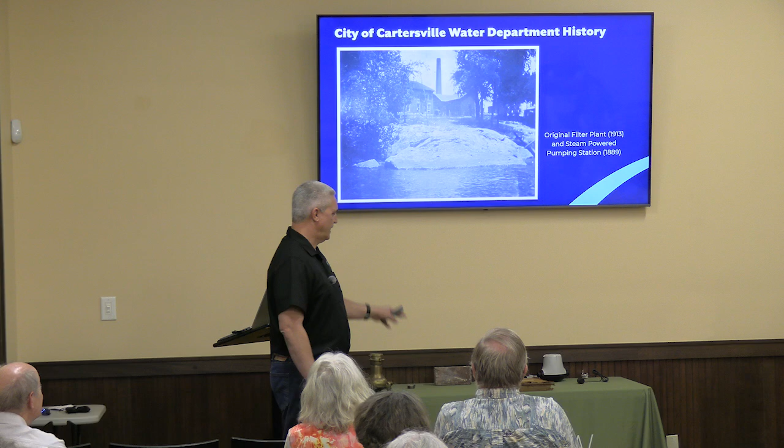I try not to bring too many props here, but I do want to show you because this is fascinating to me. I did not know about this contract, but I found it in the meeting minutes of the city of Cartersville's city council meetings. This is from August 2nd of 1887 to February 14th of 1893. You can see this just sits in the vault over there at City Hall.

But on, where's it at? I just wanted to show you. Here we go. This is the contract, written and signed in this book by the alderman and the mayor of the city of Cartersville.

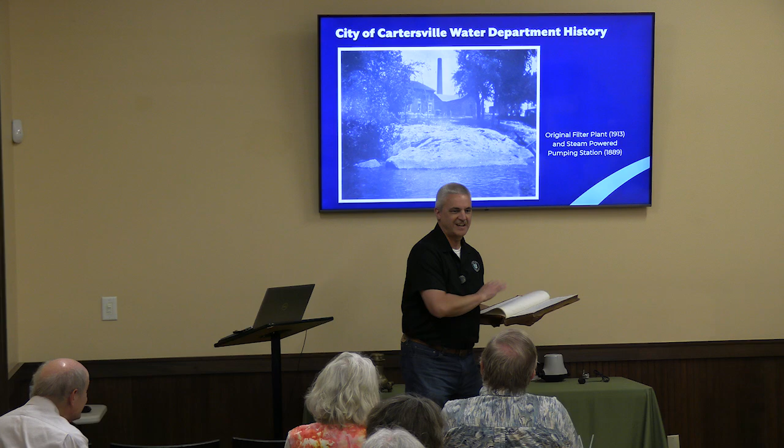So that's how I found out that this existed. And I just wanted to show you one thing. I know this has nothing to do with the water, but it just fascinated me. Look at that calligraphy. You see that? We used to know how to write.

Oh, it is. It's definitely really fancy. It's hard to read that kind of cursive writing. I know, from way back.

When I was doing that research, I went in and actually retyped the contract in my English, and it took weeks just to read and get it on the paper and try and get it right. So I have it in a Word document now, but that's more fun, right?

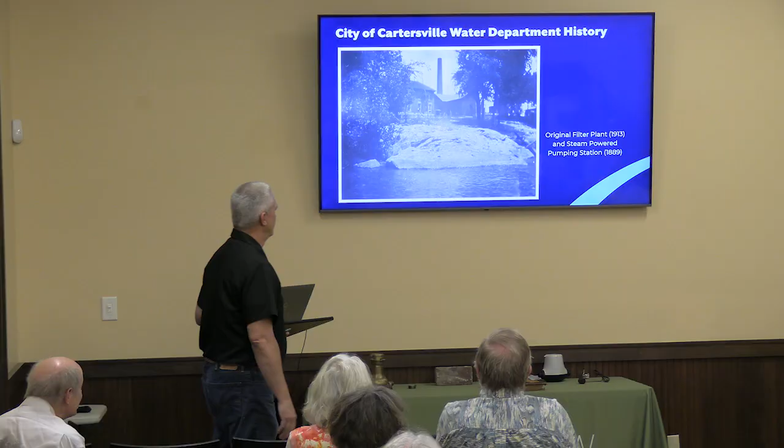But anyway, that's where the water system started. So what they built, this is a little copy of what I just showed you. August 6th of 1888, they entered into the contract, a 30-year contract. So again, this is a private company coming into Cartersville, building the system. Cartersville had the right to use it, but it did not belong to Cartersville.

It was a 30-year contract. The Jeter and Boardman would operate it for $2,500 a year. The reason it's $2,500 a year is they installed 50 hydrants, and they charged $50 a year per hydrant to have that system in Cartersville.

They built from nothing to an entire water system between March and October of 1889, digging with mules and laying pipe by hand. It was cast iron pipe.

The system included the spring, as I mentioned, two 60 horsepower coal-fired boilers, two 700,000 gallon per day compound duplex steam pumps. They were the Worthington brand, if you're familiar with steam engines and pumps. About 6 miles of pipe, one steel water tank on top of a 70-foot brick tower. And if you know the area, Jones and Stokely Street up there on Summer Hill, the corner right there, I think there's some apartments or housing right there on that corner now.

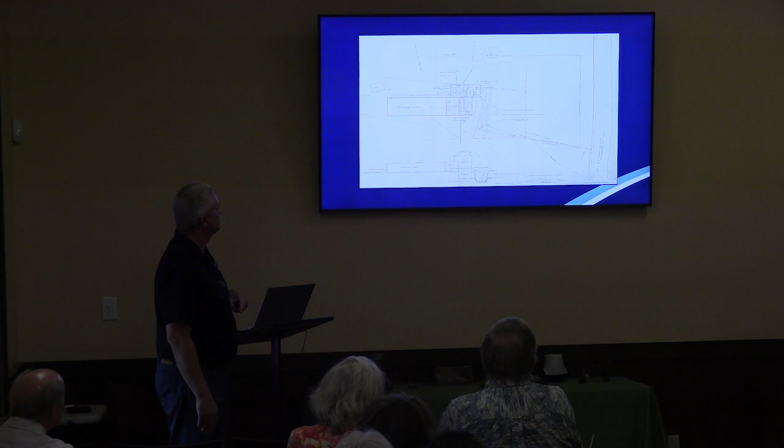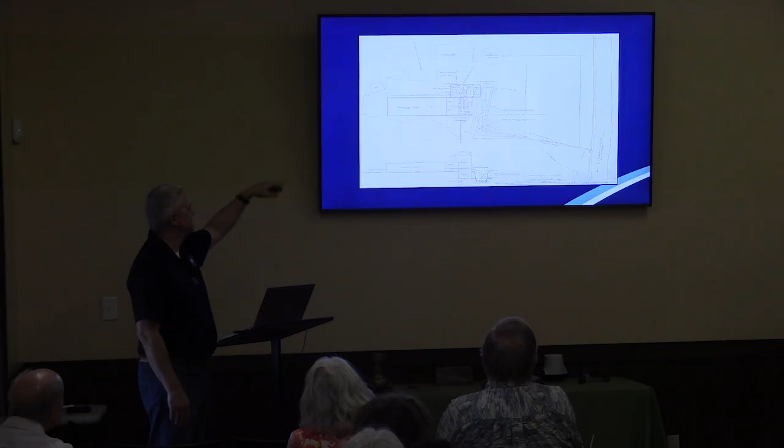This is one of them, that's kind of the layout. You see there's a plan view up top and a profile down at the bottom. You can see to the right, that's the Etowah River. Up above it, outlined at the top, you can see where the old spring was, the circle. That's the old spring. To the left of that is where the pumps and boilers were, with a coal yard right outside. So that's the old stuff, 1889. And then the 1913 plant is right in the middle.

They put an intake down on the river, just a pipe sticking in, and pumped it by electricity, right? New thing at the time, into this plant. That plant could treat 1 million gallons per day. It had two sand filters and what they called a subsidence basin or settling basin, where you coagulate the water, settle out the dirty stuff, take the clean water off the top, filter it through the sand, and pump it out.

But that is the original drawing. That stuff is still there. It's in the trees, you have to dig for it. There may be critters living in it, but it's still there. There's actually a little more than that, and we'll get into that in a second.

This is another view I wanted to show, a close-up of the chemical injection. I'm not going to do the whole water treatment thing, but the way you do it is you put aluminum sulfate, or at the time they called it sulfate of alumina, or what we call alum, into the water. It coagulates it and makes the dirt turn into solids, which drop to the bottom by gravity, and then you filter the clean water off the top.

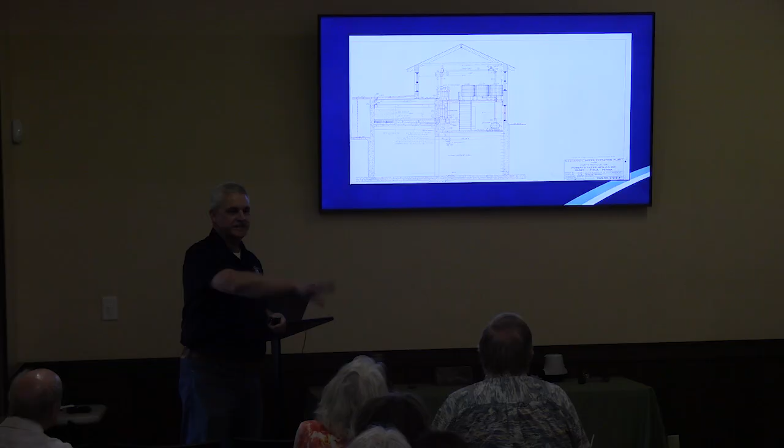And that was it, right? When Roberts Filter Manufacturing, like I said, just got the dirt out. Something that didn't happen until 1908, and Roberts Filter was one of the first ones to get on board. If you notice, there are 3 tanks up there, like wooden barrels. The two on the right, I know you can't read it because I can't read it either, but it says alum. That's the aluminum sulfate.

The one to the left says hypo. You know what hypo is? Chlorine. Chlorine is bleach, right? They had figured out that just getting the dirt out is not good enough. People get sick still.

So in 1908, Jersey City, New Jersey, America started disinfecting drinking water with chlorine. Right down the river from them, in Philadelphia, Pennsylvania, was a large plant that first started adding chlorine to their water to disinfect it. Sicknesses went down, typhoid kind of went away, and cholera and those waterborne diseases. Right down the road from them, Darby, Pennsylvania, Roberts Filter Manufacturing figured that out. They started sticking it in their plans. First one in Georgia, right there. We were the first ones to disinfect our water in Georgia with that tank.

The way it worked is you poured bleach in the top and it dripped through a funnel and went into the water. We don't know how much, it could be a tank a day or a tank a month. It was just chlorine going in the water. Anyway, that was fascinating to me. And I got that right from the designer or design company.

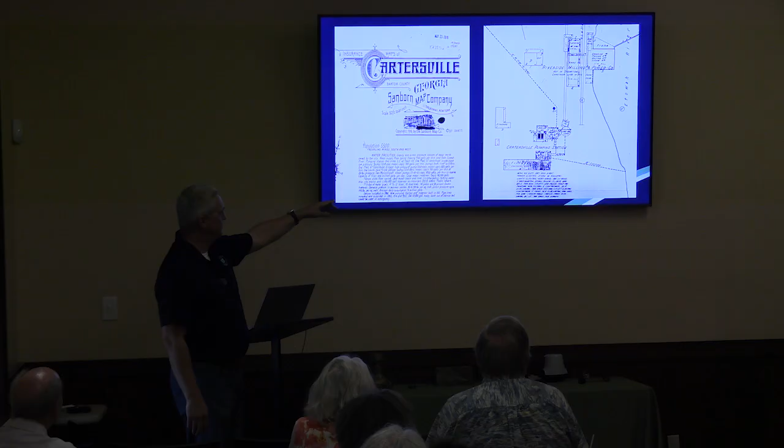Over to the right, you get a little bit better picture of this system. River's over here, there's a suction in here. We've got the filters, and then it's pumped out. They would also use this spring as a reservoir - they could pull out of that as well. So they continued using both. Somewhere in the writings it says we're still using the spring, but we'll use the river in an emergency, even after we have the plant here. So it was hard to give that spring up, I think.

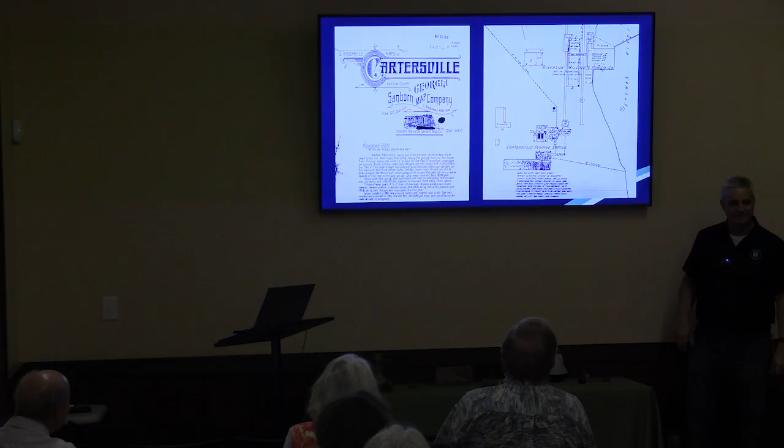If you go out there right now, you can find that spring. There is a circle in the ground - it's like a crop circle out there. One of the last operators of this plant still worked here when I started. I trapped him one day and said, go with me and show me this thing. And he did, and he showed me that circle. I'd never seen it before, but it's still there.

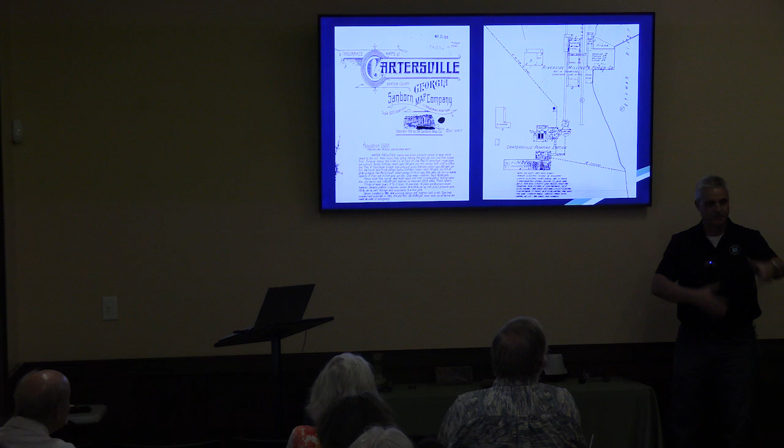So I started digging. I don't know if I was supposed to. But I did read that as this thing was built, it was brick lined around the outside of it. So what I did was I dug up a brick and kept it in my office. This is out of that spring right there. That was the brick that was laid there in 1889. You can't have that one.

So that's just kind of a picture. You can see where the old mill is over to the side and where the dam kind of sticks out there.

But yeah, I've crawled all through that thing and it's fascinating. It's amazing how little the technology has changed in water treatment. It works, right John? Still doing it the same way. It's cost more though.

So, okay, where are we at? By 1918, we had already destroyed the tank on the hill over here, the old steel riveted tank. We needed a new one.

In 1907, we contracted with a - I don't know if he was a contractor or a farmer - contracted to work not fewer than 10 mules a day digging a water reservoir on top of Ackerman Hill, which we call Reservoir Hill, Morningside Drive behind the old cable TV place up there on the hill now. I don't know that he ever finished that job.

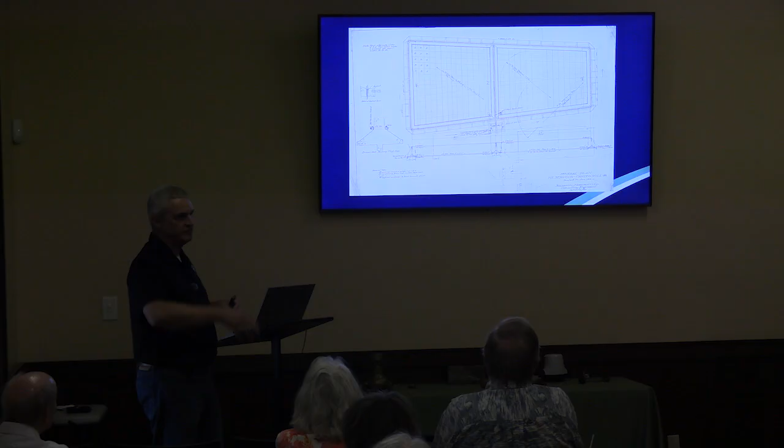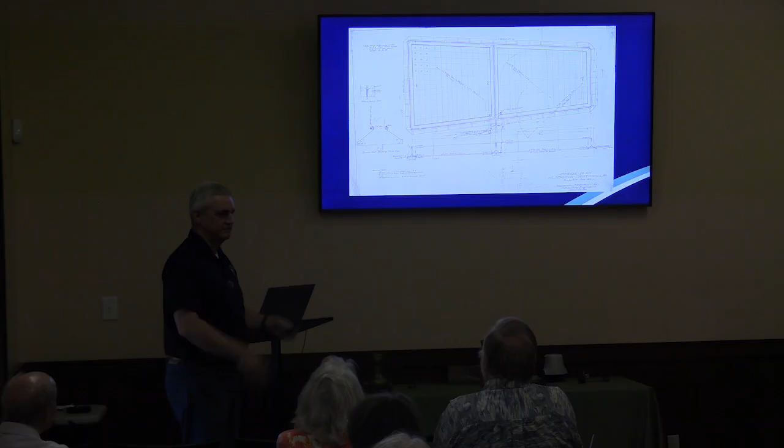But when we built the treatment plant, we had to have a place to pump the water to. So we contracted with Solomon Norcross to design a 1.1 million gallon open top water storage reservoir, where the water was pumped out of the treatment plant into this reservoir, and then it fed by gravity to the town from there. Again, when I started working here, I went in that reservoir - it was still there. People dumped trash in it, but it was there. It only got covered up within the last 15 years, I think, when they put the big cell tower up there on top of that hill.

What it looked like at the time was that. That's drinking water - that's not creek water, that's not river water, spring water. That is drinking water. So I don't know what all went into that water before you got it. As you can see how well it's protected - I mean, a 6-foot fence, no bird's going to go over that, right?

So yeah, state of the art at the time. Dug out by mules, and then concreted with asphalt joints, 1.1 million gallons.

Also in this time, I'm not going to go too much into it because I don't have a lot of information, but we were building a sewer system. At the time, the sewer system was pipe it out and dump it in the nearest water, the Etowah River. We had two outfalls. One was this far from the intake into the Etowah River for the water treatment plant - you could throw a rock from one to the other. It was downstream. The other was over near where our sewer outfall is now, on the 113 bridge at the Etowah River where Pettit Creek goes in. That was our other outfall. So if you were on that side of the courthouse, Bartow Street, all your sewer flowed that way. If you're on this side of the courthouse and Bartow Street, everything went near the water plant.

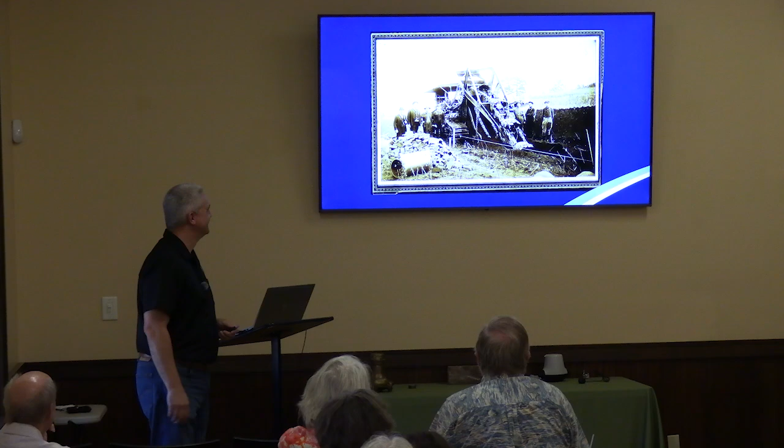I'm not sure where this was or what they were putting in there. I just know they were very proud of their machines—otherwise there's no reason for two men to be in suits out there when we're digging ditches. You can see he's still got his suit and hat on, so he's really proud.

Those are flushing manholes. What we would do is run water into a sewer manhole, and if the sewer got clogged, you'd go into the manhole and open a valve connected directly to the drinking water, by the way. You'd fill it up, and then it works like a toilet—flush it out. We had them all over, up until like 1990.

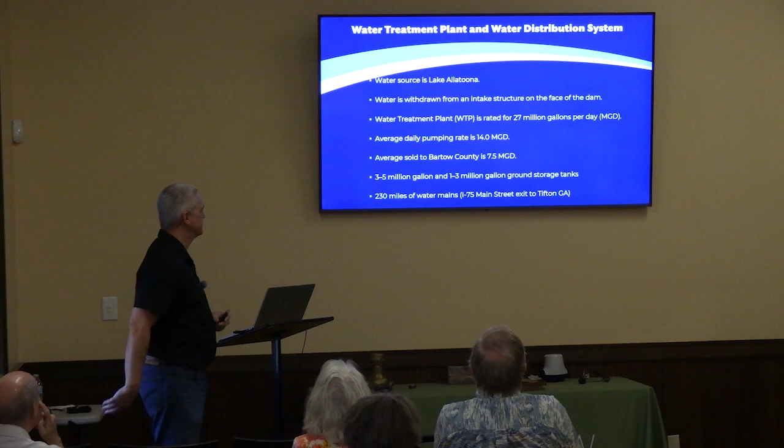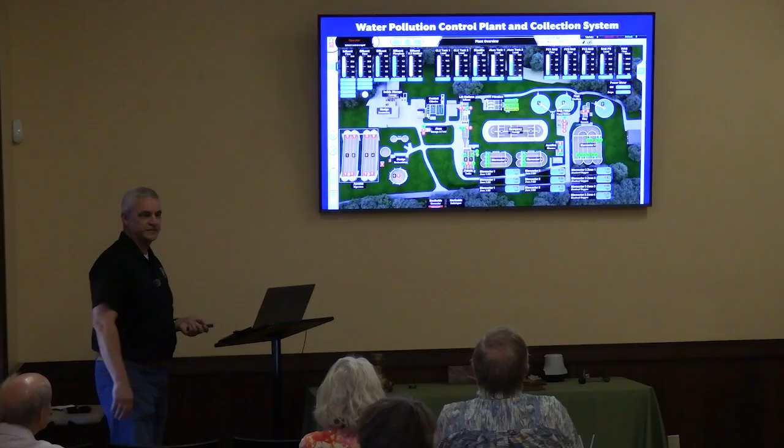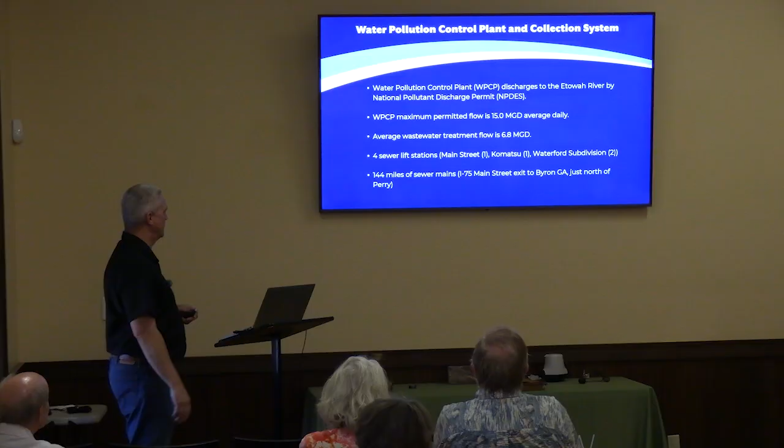Again, another SCADA shot - this is off a computer screen where they control that plant. So it's pretty well advanced, and we're making it more advanced day by day. We average about 6.8 million gallons per day. We only have 4 sewer lift stations that are not gravity - 2 of them are in Waterford, and 2 of them are over near I-75 on Main Street. 144 miles of sewer mains in the city.

Yeah, we're adding to it. If you don't know where my office is, we're now over on Douthit Ferry Road, 301 Douthit Ferry Road, up near the First Baptist Church there. We just moved in there last year. Actually, the dedication of that was June 19th last year, the birth date of the Cartersville Water Department, and I failed to mention it when we were doing it. But yes, that's our new office. And with that, I'm done.

You mentioned that the water piping was cast iron. Yes. The sewer piping was concrete, that's correct. Are those pipes still under there? Some of them are. And you still use them? Yes, if they're in the ground, we're still using them - especially if they're right downtown and near the railroad, because we're afraid to touch them.

I bet. Yeah, I mentioned the different types of pipe. We have some of that old cast iron still in service. If you go down by where old Union Carbide was, right there at the curve by the railroad spur, that line underneath there is still original. We made a tap on it about 10 years ago, and I got them to bring me the coupon where they drilled the tap into the line. That is cast iron pipe from 1889.